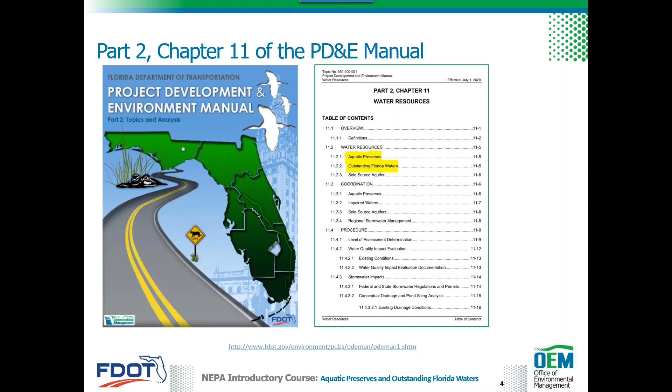Let's start with waters designated as outstanding Florida waters. An outstanding Florida water, or OFW, is a designated water body worthy of special protection because of its natural attributes. This special designation is applied to certain waters and is intended to protect existing good water quality. Section 403.06127 of the Florida Statutes, or FS, enables the Florida Department of Environmental Protection, or FDEP, to establish a special category of water bodies to be designated as outstanding Florida waters.

These outstanding Florida waters are frequently open water areas that are managed by the state or federal government as parks, and they are listed in Chapter 62-302.700 of the Florida Administrative Code, or FAC. They include waters within parks, wildlife refuges, recreation areas, and others listed here. Generally, the waters within these managed areas are OFWs because the managing agency has requested that they have this special protection. Aquatic preserves, along with other designated water bodies, are generally considered OFWs. However, not all OFWs are aquatic preserves.

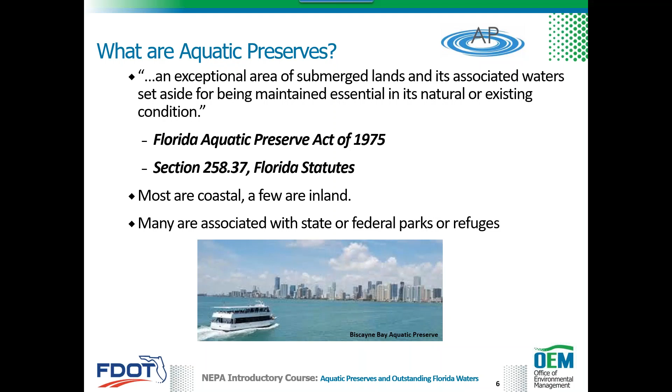Today, there are 42 aquatic preserves in Florida. All but 4 of these submerged lands of exceptional beauty are located along Florida's 8,400 miles of coastline in the shallow waters of marshes and estuaries. Many aquatic preserves are associated with public lands, such as state or federal parks or refuges. Now that we know what these designations mean, let's begin Lesson 2, where we'll discuss the process for determining project involvement with aquatic preserves and outstanding Florida waters.

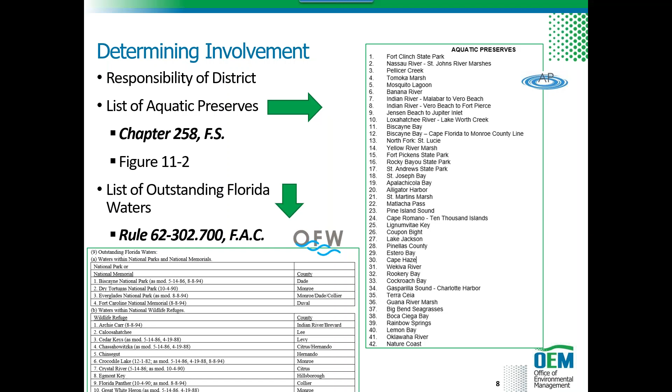It's the responsibility of the FDOT district to determine project involvement with aquatic preserves and outstanding Florida waters. The district may refer to lists along with project location maps to determine if the project may involve one or more of these designated water bodies. Areas in the state designated as aquatic preserves are listed in Chapter 258 FS. Areas that are designated as OFWs are listed in Rule 62-302.700 FAC. The list of aquatic preserves and a link to the list of OFWs can be found in Part 2, Chapter 11 of the PD&E Manual.

The Efficient Transportation Decision-Making, or ETDM process, is also used to determine project involvement with these designated water bodies. For projects that qualify, the ETDM process provides agencies and other stakeholders the opportunity for early input and consideration of the environment in transportation planning. This is accomplished through the use of an online environmental screening tool, or EST. Further information regarding the ETDM process and the EST can be found in the ETDM Manual.

If a project was screened in the EST, the Special Designations section of the Programming Screen Summary Report may include applicable comments from an FDEP Environmental Technical Advisory Team, or ETAT member. Here is a sample from an actual Programming Screen Summary Report. For this project, FDEP comments identify potential impacts to a designated aquatic preserve and outstanding Florida water. They also recommend evaluation of stormwater treatment adequacy and suggest ways to reduce impacts to water quality.

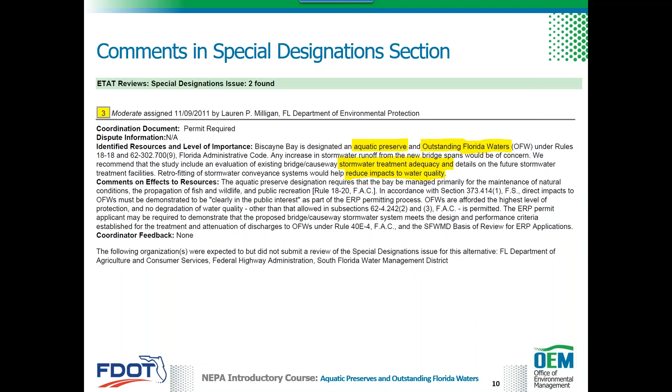The EST also includes GIS data and maps that can be used to identify the proximity of the project to any aquatic preserves or outstanding Florida waters. For projects that do not qualify for EST screening, the Area of Interest tool in the EST can be used to review aquatic preserves and outstanding Florida waters GIS data layers.

We'll now proceed to Lesson 3, which covers coordination that's required if a project may impact an aquatic preserve. Please note, this coordination is only required for aquatic preserves, not for outstanding Florida waters that are not also designated as aquatic preserves. As was discussed in the previous lesson, the district reviews the information in the Programming Screen Summary Report or GIS data layers in the EST. Then the district uses this information to determine if the project is in, over, or adjacent to an aquatic preserve and whether there are potential impacts.

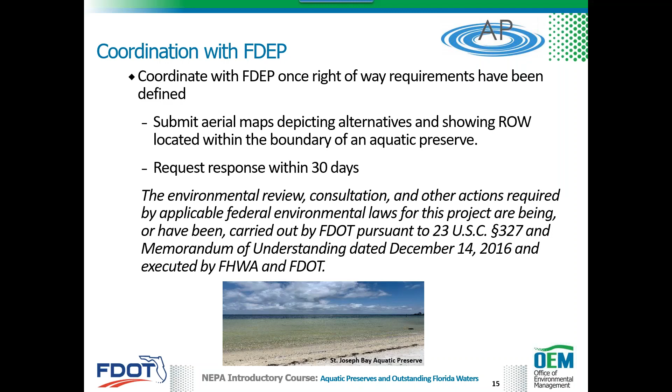From here, we'll proceed to Lesson 4 to discuss documentation. The environmental document should summarize involvement with or impacts to aquatic preserves or outstanding Florida waters. For all types of environmental documents, coordination letters with FDEP are saved in the project file in the statewide environmental project tracker called SWEPT. It's recommended that they be placed in the aquatic preserves and outstanding Florida waters folder within SWEPT.

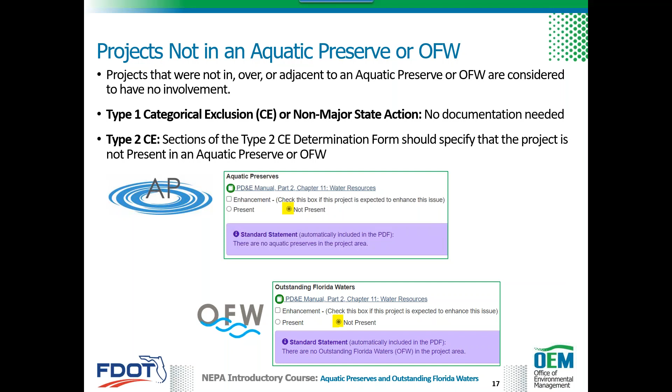Projects that were not in, over, or adjacent to an aquatic preserve or outstanding Florida water are considered to have no involvement. Now, this is documented differently depending on the type of environmental document being prepared for the project. If the project is a Type 1 categorical exclusion, or CE, or a non-major state action called an NMSA, no documentation is needed. For a Type 2 categorical exclusion, referred to as a Type 2 CE, select Not Present in the Aquatic Preserve and Outstanding Florida Waters section of the Type 2 CE determination form. The standard statements shown in purple are shown in the Type 2 CE document.

For a State Environmental Impact Report, or SEIR, aquatic preserves and outstanding Florida waters are combined into one section. Select Not Present, and the standard statement is included in the document. For an environmental assessment, referred to as an EA, or an environmental impact statement, referred to as an EIS, simply state in the Aquatic Preserves and Outstanding Florida Waters section that the project is not in an aquatic preserve or outstanding Florida water.

Now let's discuss documentation for those projects that require coordination with FDEP. For Type 1 CEs or NMSAs located in an aquatic preserve, which will have no impact on the aquatic preserve, include coordinations or other documentation in the project file. In cases where the project needs an Environmental Resource Permit or ERP, address any remaining issues during permitting.

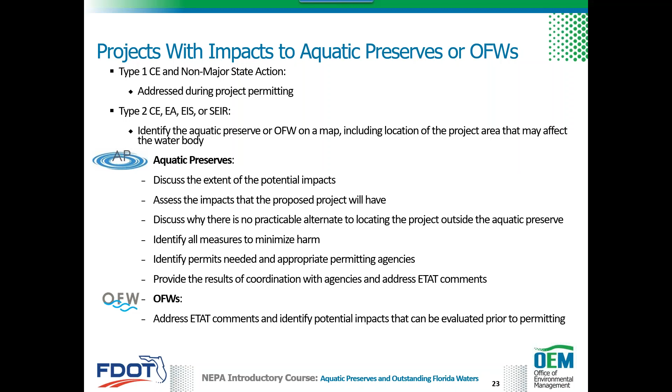For projects impacting an aquatic preserve, the environmental document should discuss the extent of potential impacts to the aquatic preserve, assess the impacts that the project will have on the aquatic preserve, discuss why there is no practicable alternative to locating the project outside of the aquatic preserve, identify all measures to minimize harm to the aquatic preserve, identify permits needed and appropriate permitting agencies, provide the results of coordination with appropriate agencies having jurisdiction over the aquatic preserve, and address related ETAT comments. For projects impacting an OFW, address any ETAT comments and identify potential impacts that can be evaluated prior to permitting, including potential alternative and treatment strategies.

For a Type 2 CE project with impacts to an aquatic preserve, check Present and Impacted in the Aquatic Preserve section of the Type 2 CE determination form. In the summary, identify the name of the applicable water body and include the details mentioned in the previous slide. And remember to include FDEP correspondence in the appendix. For a SEER, documentation is similar in the SEER form.

For EAs and EISs, discuss the impacts, coordination with FDEP, along with the other items listed in the previous slide in the Aquatic Preserves and Outstanding Florida Waters section. FDEP coordination letters should also be placed in the appendix.

Now for a Type 2 CE project with impacts to an OFW, check Present in the Outstanding Florida Waters section of the Type 2 CE determination form. Details should be included in the summary box, and remember to include any supplemental information in the project file.

For a SEER, documentation is similar in the SEER form. For EAs and EISs, document the impacts and coordination in the Aquatic Preserve and Outstanding Florida Waters section. Coordination letters are included in the appendix.

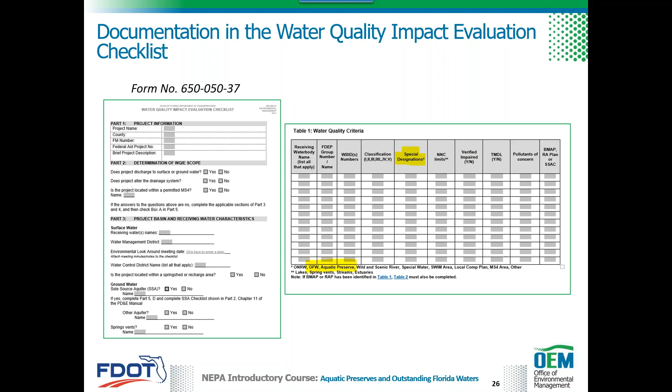Now we will proceed to Lesson 5, where we discuss permitting for projects involving aquatic preserves or outstanding Florida waters. Projects located in OFWs receive a greater level of scrutiny by the state environmental regulatory agencies during environmental resource permitting. It's important to remember that aquatic preserves are outstanding Florida waters. FDEP and water management districts generally cannot permit direct pollutant discharge to OFWs because this could lower the existing water quality, thus significantly degrading them.

Pursuant to Rule 62-4.242 FAC, no permit or water quality certification will be issued for an activity that will discharge into an OFW unless it's demonstrated that the proposed activity is clearly in the public interest and either a permit for the activity has been issued or application for such permit was complete on the effective date of the OFW designation, or the existing ambient water quality within OFWs will not be lowered as a result of the proposed activity or discharge.

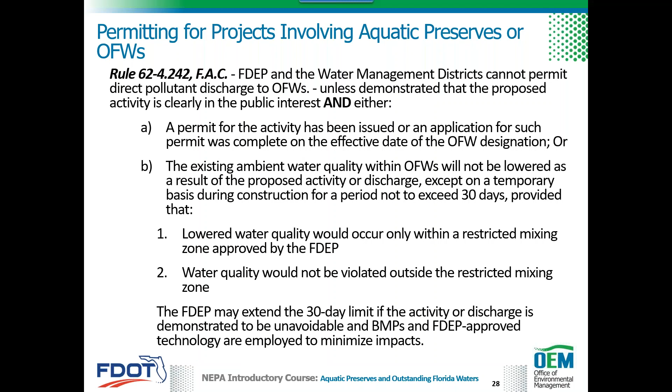Exceptions can be made for activities which occur on a temporary basis during construction for a period not to exceed 30 days. And this is provided that lowered water quality would occur only within a restricted mixing zone that's approved by DEP, and water quality would not be violated outside the restricted mixing zone. The FDEP may extend the 30-day limit if the activity or discharge is demonstrated to be unavoidable and best management practices and FDEP-approved technology are employed to minimize impacts.

Additional information on what constitutes assurance that the project is clearly in the public interest can be found in the Florida statutes and FAC. In order to document that the project is in the public interest, the district should note whether the activities will be temporary or permanent and determine if activities will adversely affect public health, safety, or welfare, or private property. Additionally, they should evaluate whether the activities will adversely affect conservation of fish and wildlife.

Some additional questions which the district should ask include: will the activities adversely affect navigation, water flow, or result in harmful erosion or shoaling? Will the activities adversely affect fishing or recreational value or marine productivity? Will the activities adversely affect or enhance significant cultural resources? What are the current conditions and relative values of functions associated with the areas to be affected? In order to meet permitting requirements, there is an emphasis on minimization and avoidance of jurisdictional areas designated as OFWs. For additional permitting information, refer to Part 1, Chapter 12 of the PD&E Manual.

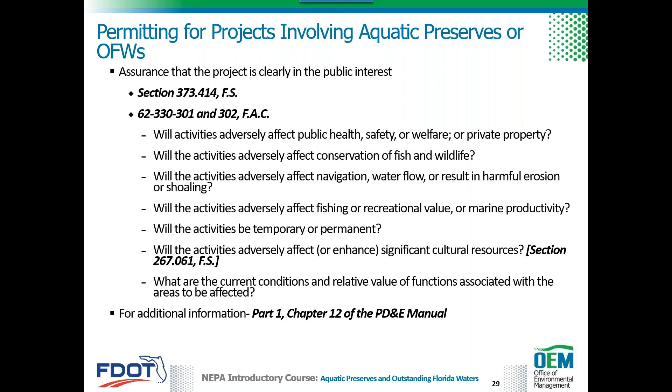In Lesson 6, we'll look into Section 4(f) applicability to aquatic preserves and outstanding Florida waters. Section 4(f) of the Department of Transportation Act of 1966 governs the use of publicly owned parks, recreation areas, wildlife and waterfowl refuges, and public or private historic sites for U.S. Department of Transportation or USDOT projects. These resources are referred to as Section 4(f) protected properties. Section 4(f) regulations only apply to the USDOT and its agencies. See Part 2, Chapter 7 of the PD&E Manual and FDOT's Section 4(f) References and Guides website for more information on Section 4(f) applicability.

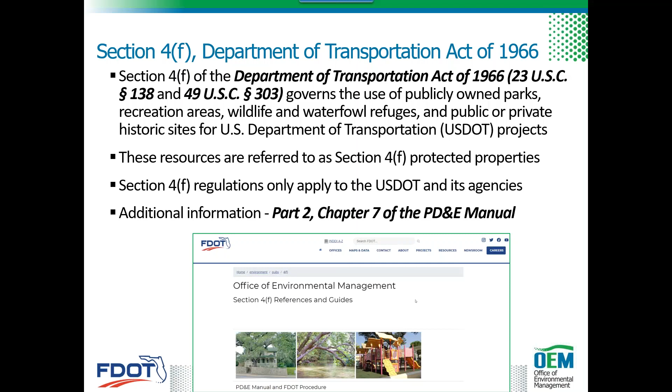Generally, aquatic preserves and OFWs are not protected by Section 4(f), since the primary purpose, unless designated, is not for recreation or wildlife or waterfowl refuges. The district should determine if there are multiple use public land holdings within these designated water bodies. Section 4(f) applies to only those portions that are designated by statute or identified in the official management plan for the area and determined through coordination with the official with jurisdiction as functioning or planned for park or recreational purposes, or as wildlife and waterfowl refuges, or which are significant historic sites. OEM has the sole responsibility for determining if Section 4(f) applies.

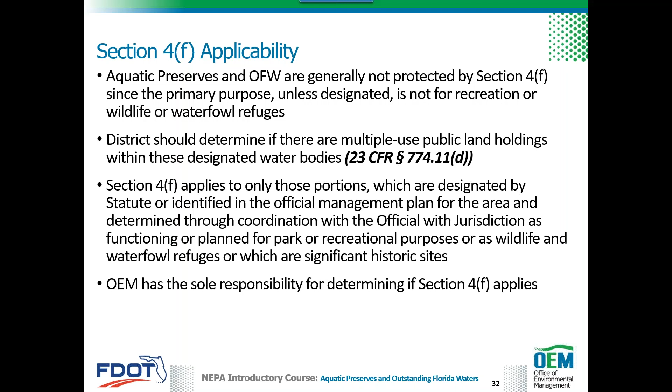The Office of Environmental Management maintains a central library of training materials as well as documents and publications, including manuals, handbooks, guidelines, and agreements. Key references pertinent to this training include the Environmental Management Academy course catalog, which is in FDOT's Learning Curve, and is also available through the OEM PD&E training track on OEM's website. Other resources include the PD&E Manual, ETDM Manual, the FDOT Procedural Document Library, and FDOT's Section 4(f) References and Guides website.